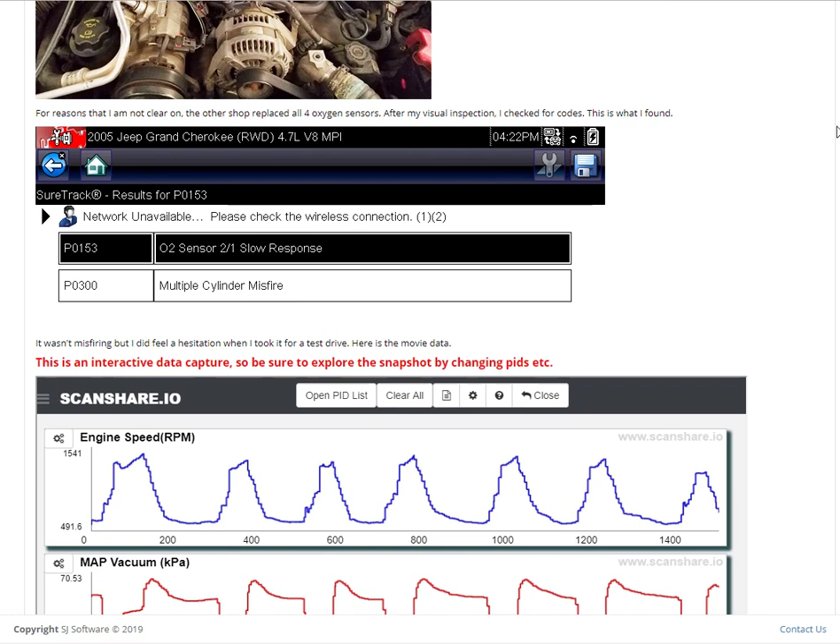So his next step was to check for codes. And when he did, he found 2: a P0153 O2 sensor Bank 2 sensor 1 slow response, and a P0300 multiple cylinder misfire. Now, at the time it wasn't misfiring, but he did feel a hesitation when he took it for a test drive.

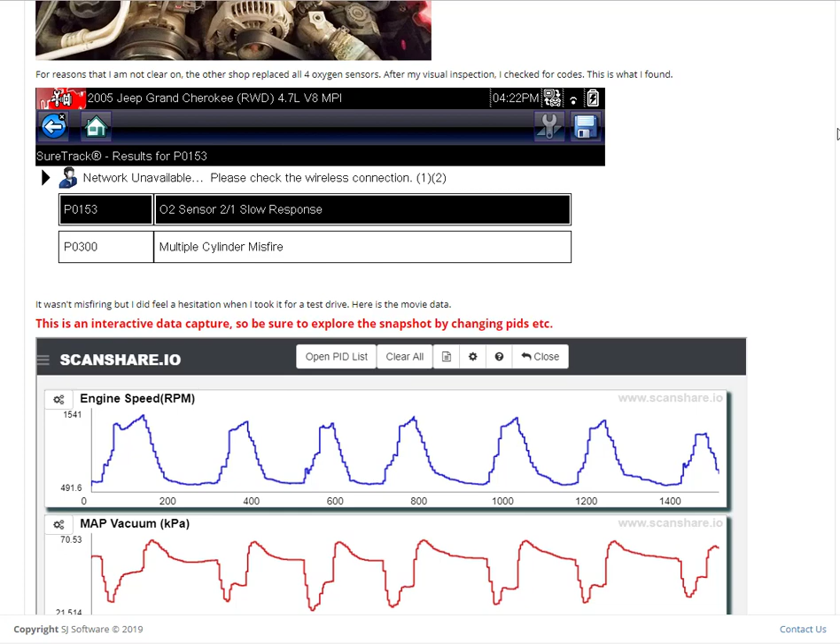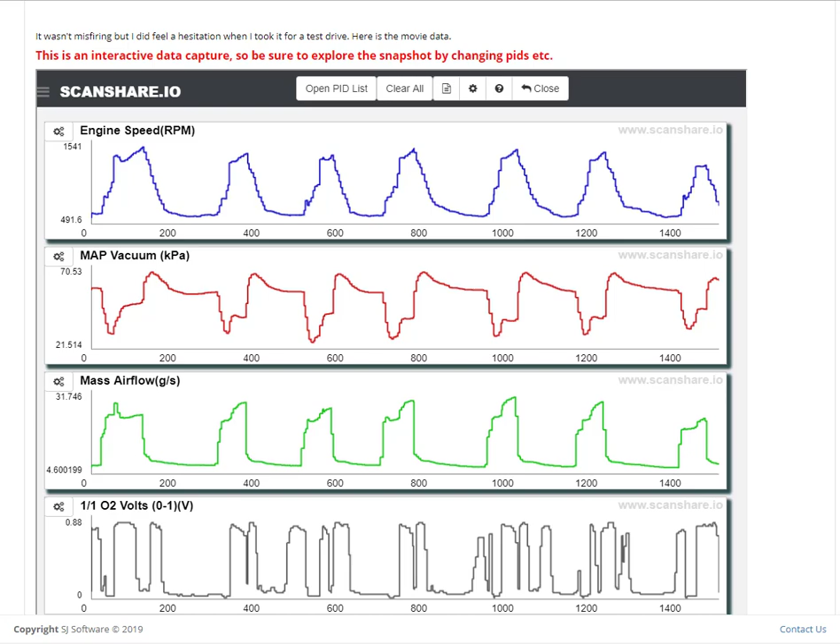He is now showing movie data from his test drive. So let me explain. Working with Carlos, I have impressed on him that when you get a car in for a problem, you want to test drive it. And you want to test drive it for a couple things.

One, the customer has their complaint, whatever it is - runs rough, has misfire, whatever. But you need to know: does it shift? Does the transmission shift? Does it feel like the exhaust is restricted? Whatnot. You need to drive it.

Now, if you're going to drive it, you might as well hook up your scan tool and capture data, because the data will be very important. Now, many technicians just either refuse to do this or don't know how to do this, but I suspect the biggest reason why it's not done is because many technicians don't know how to analyze the data.

So Carlos took this out for a drive to verify the customer's complaint, make sure that it didn't need a transmission or have an engine knock or whatever. And while he was out, he captured the data.

Now, ScanShare by default loads, in this case study format, the first 4 PIDs in the data list. And so we can open up the data list, and these are all the PIDs that he decided to capture.

Now, he didn't look at the data so much because he really didn't know what to look at, but he did what I'd asked him to do, and that is: if you're going to call me for help, or you think you're going to call me for help, I want a data capture, because I want to look at some data instead of fighting with feel and touch and smell and whatnot. So we have this.

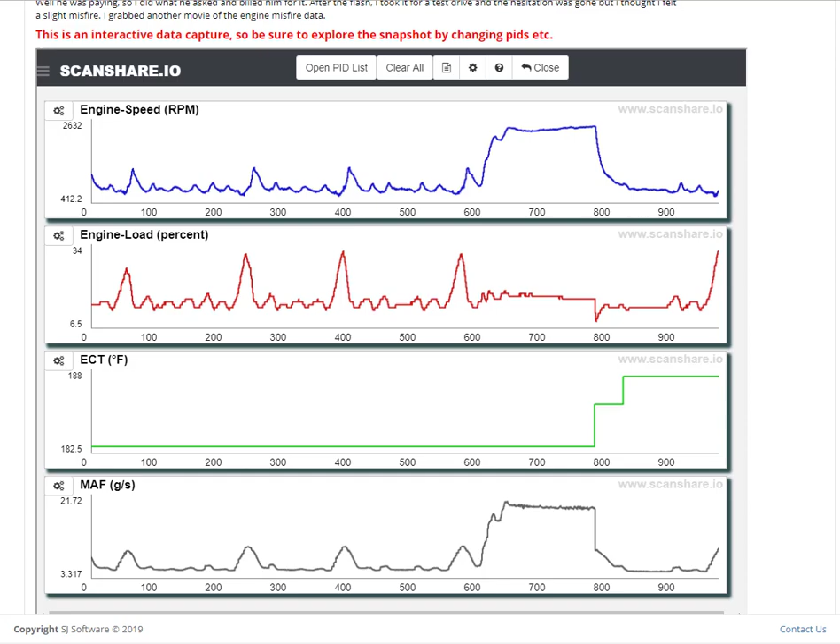Well, so here's the data he captured on the test drive, and we're going to look at it in a minute, but we want to do that at the very end here.

So the hesitation was gone, and the check engine light didn't come on during Carlos's test drive, so everybody thought it was fixed. Unfortunately, a few days later, the customer returned, and the problem is there again, or at least the check engine light is on.

This time Carlos is saying, look, you have to leave this with me, and by the way, yes you do have to pay me to diagnose it, because I'm not going to work for free. You've already done the Google thing, you've already done the YouTube thing, now it's time to be professional about this. The customer said, all right, I'll pay for it and I'll leave it, and he went away.

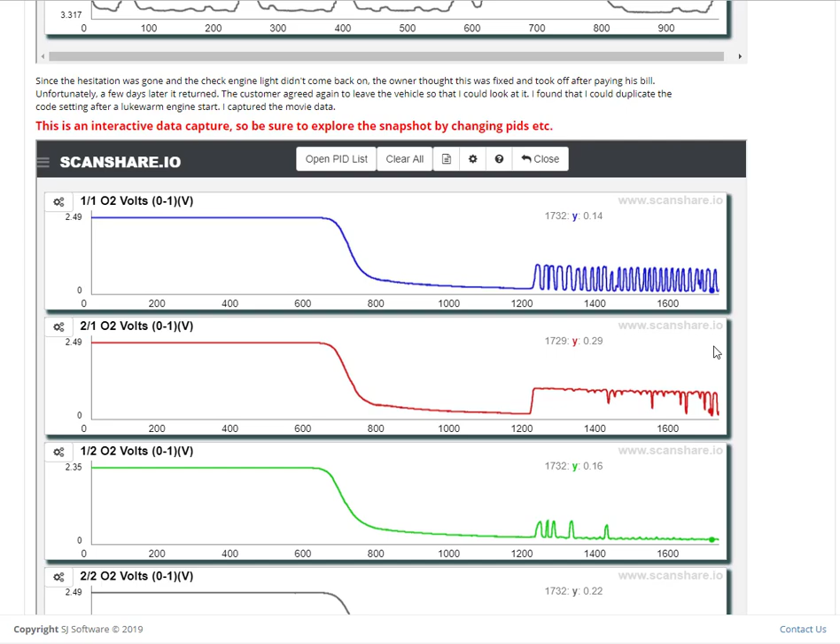So Carlos, for reasons I'll get into in a minute, decided to start this engine up lukewarm in his service bay and see what he could find concerning the O2 sensors as far as their response to a lukewarm start.

So what he has here is the total PID list he captured. Now, there's times on some vehicles where you don't want to pick all the PIDs available because you slow the data rate down. But this car has a pretty quick data rate, so he didn't need to limit his PIDs like this, but he did. So this is what we had to work with.

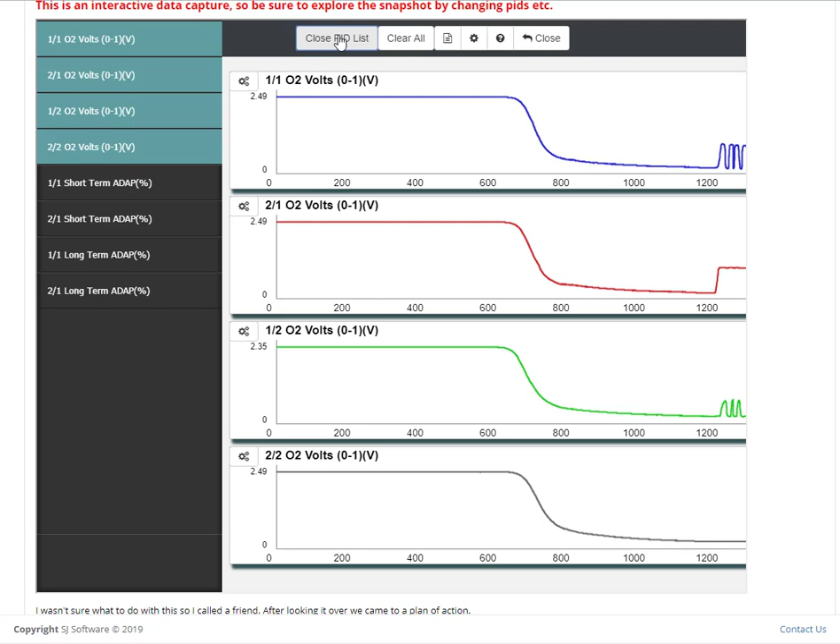So what he did is he's looking at these O2 sensors as they're heating up. Here we have the engine started, and the bias voltage is reading the same on all the sensors. Then right around frame 650, 700, the O2 sensors start heating up and they start responding.

After a period of time, all 4 sensors are reporting lean. Now let's stop, because now let's go to the other part of the story, which is Carlos got to here, and then he called me because he wasn't sure what to do. So I said my first thought was, look, did you get me some data to look at before I come to your shop, before I spend the time to do that? Do you have some data you captured that you can give me?

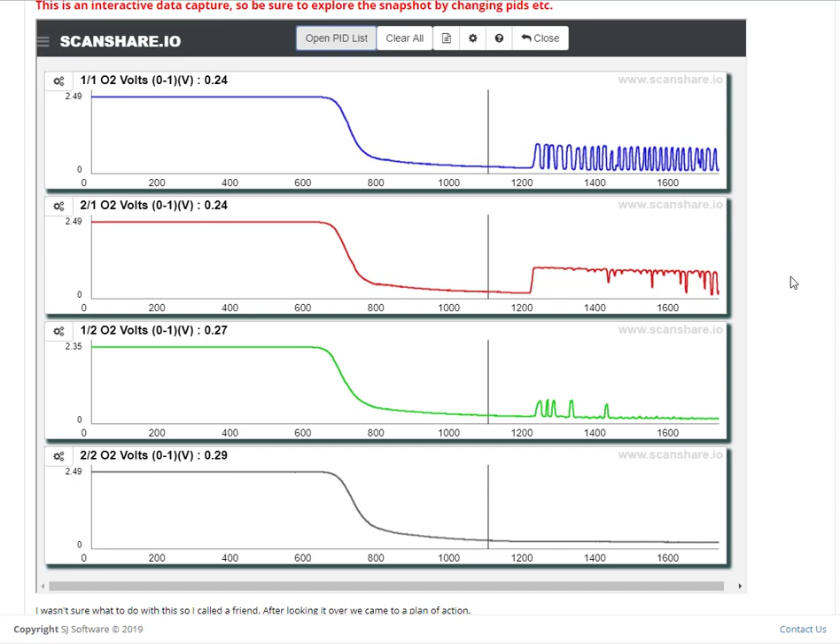If so, give me the ScanShare links, the URL that ScanShare creates for you. He sent it to me, and I looked over the data. So let me show you what I found, starting with his first capture.

Remember, this came to him with hesitation and the check engine light. He recorded the data, but he didn't really look at it. So now I'm going to look at it. First thing I did is open the PID list to see, okay, what PIDs did he give me to work with?

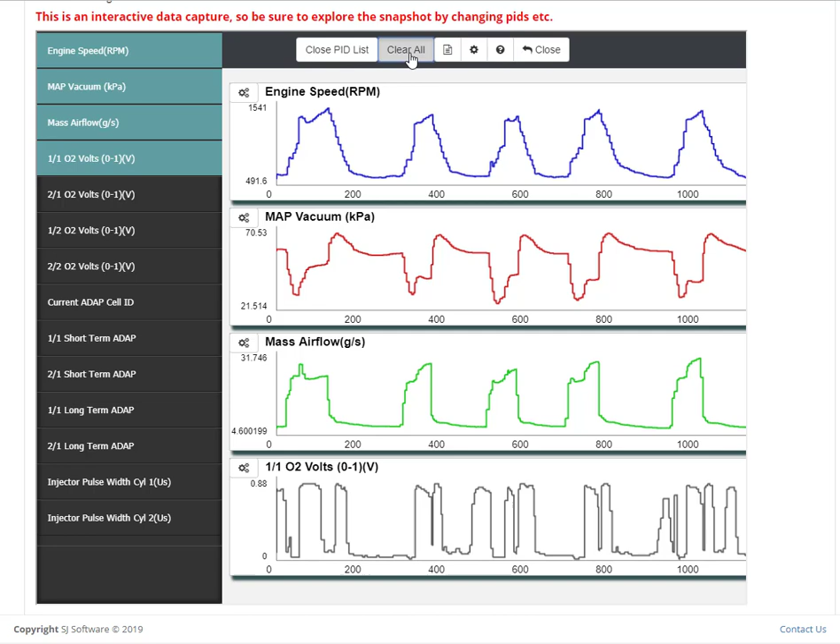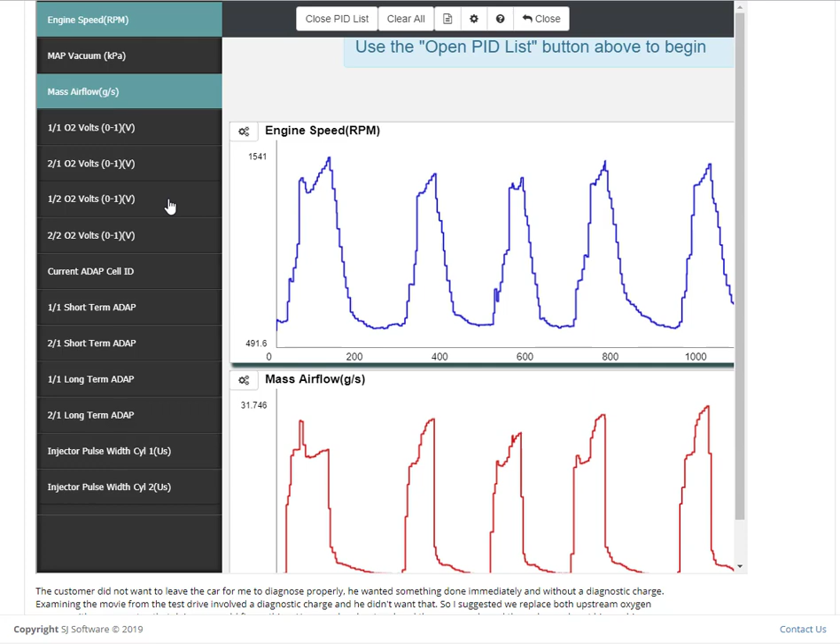There are PIDs I wish he had included that he didn't, but let's see what we can do with this. So we're going to clear these codes, PIDs, and pick different ones. Here's engine speed, engine speed, mass airflow, and then let's look at the upstream sensors for bank 1 and 2. Bring that into focus.

This is a test drive, and there's a number of acceleration events. The first thing I'm going to do is, since this thing hesitates on acceleration, highlight just one of the periods where it's being accelerated. So we have 4 PIDs picked: engine speed, mass airflow, bank 1 sensor 1 upstream, and bank 2 sensor 1 upstream.

Now you can see here we are accelerating. He didn't give me TP, I wish he did, but he didn't. We can see the mass airflow increasing, so we are accelerating. But note what's going on with the 2 upstream sensors: they're lean. And they shouldn't be. We are accelerating, we should not be lean. We should either be switching rich-lean, or in power enrichment mode. Given the acceleration curve here, this is light acceleration, so we should be in closed loop. We should not be seeing the O2 sensors this lean. So this explains his hesitation.

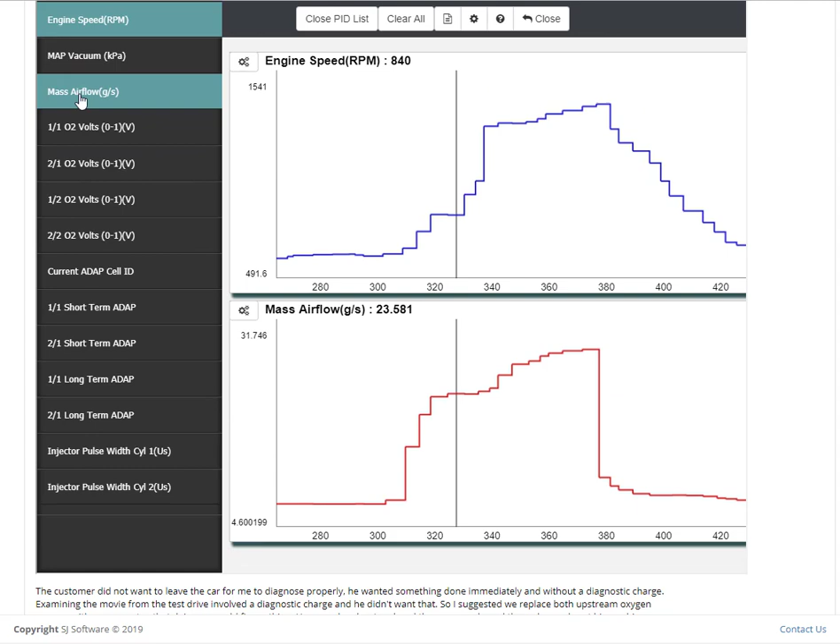So let's dig in further and see if we can find anything else going on here. I've got the engine speed, the mass airflow. I'm going to pick just the bank 1 upstream sensor and use that as a reference, assuming it represents the other upstream sensor because we just saw it did. That gives me more room here to look at stuff.

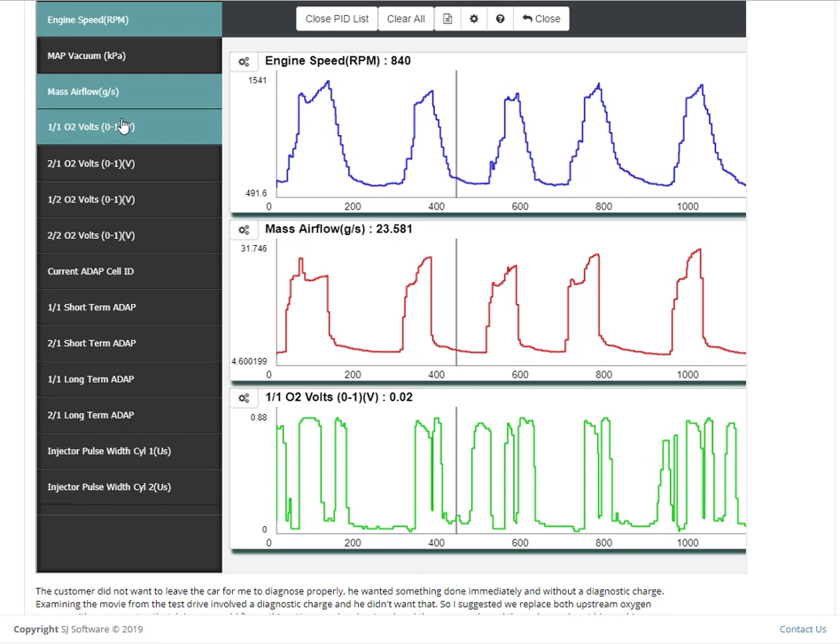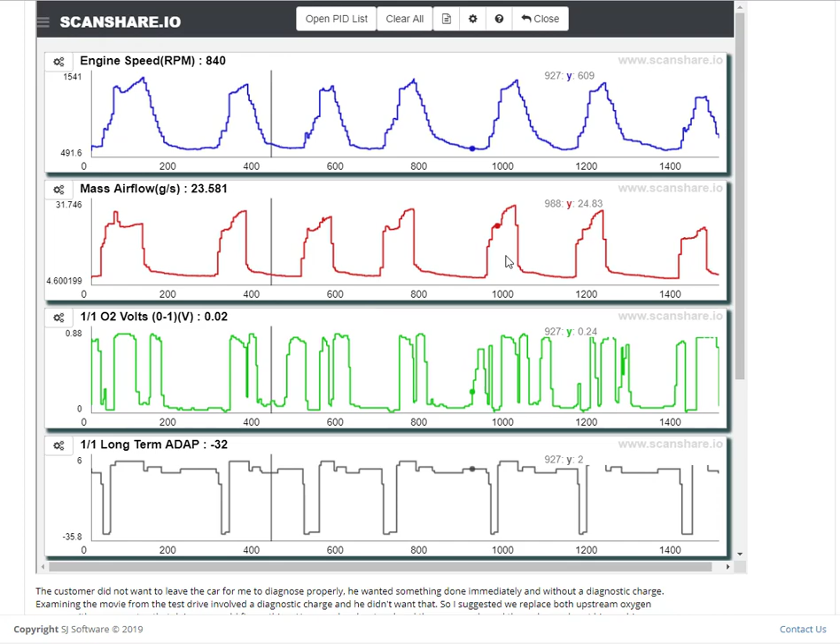And what I did is I looked at the adaptives, the long-term adaptives, and then the current adaptive cell. So we're going to highlight again an area of acceleration. I'm going to put my cursor where you can see RPM going up, you can see the mass airflow going up. The bank 1 upstream O2 sensor is showing lean.

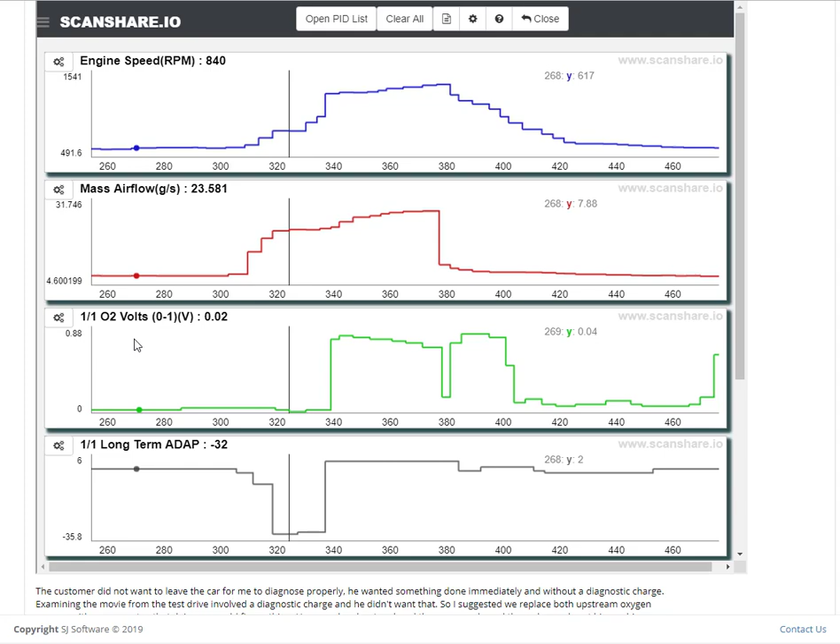Now look at the adaptive. Bank 1 and bank 2 long-term adaptives are very negative. Bank 1 is a lot worse. That means we are subtracting fuel from the base fuel calculation. This is a learned behavior, the ECM has learned to do this. And it shouldn't be doing this because it's lean and it's taking away fuel. So it knows it's lean and it's taking away fuel because in that adaptive cell, we've learned to do that.

Now, an adaptive cell means the long-term fuel trim learned for that RPM load range, and you see the blocks here because it's different cells. So over here, before we had a problem, we're in adaptive cell 5, and we're in adaptive cell 25, and then the long-term adaptation is only 2, which is nothing. Then over here, where we get moving and the oxygen sensor is no longer lean, we're in adaptive cell 13, and our long-term adaptation is 3.

So that's all normal stuff, but what's not normal is this right here, where we are very negative on our long-term adaptive, and we're in cell 16. So this has learned to do this, and that's a problem.

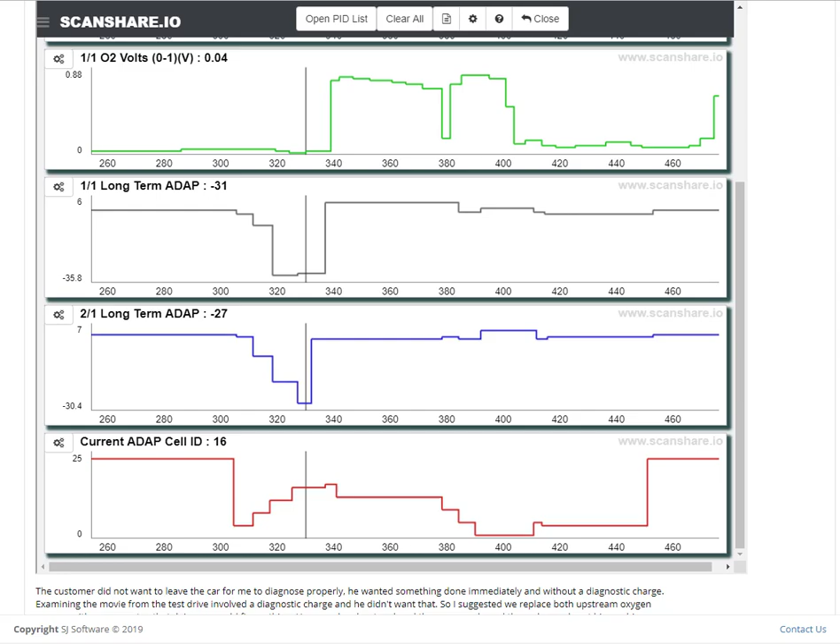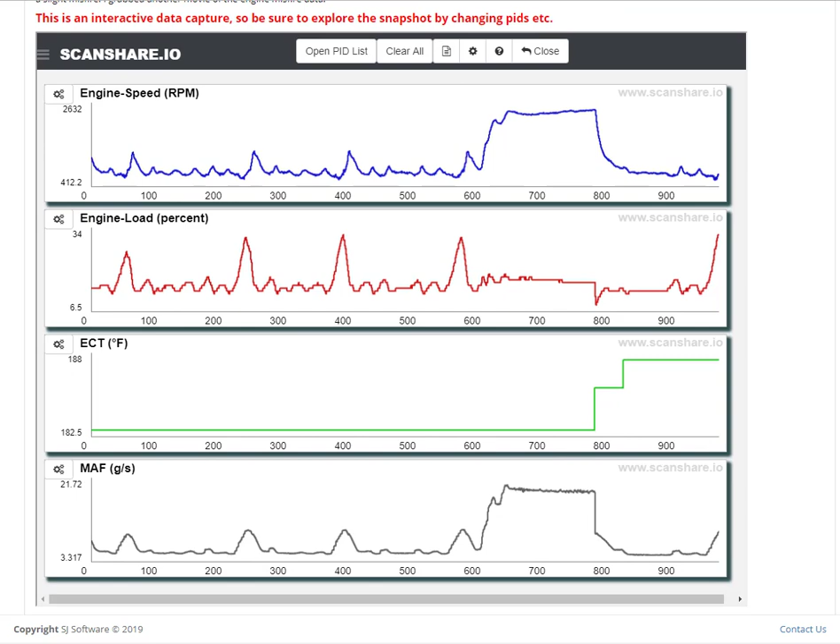So let's now go to his next capture here, and this is where he had the ECM flashed, and then he took it for a test drive, and the hesitation was gone. But he did feel a slight misfire.

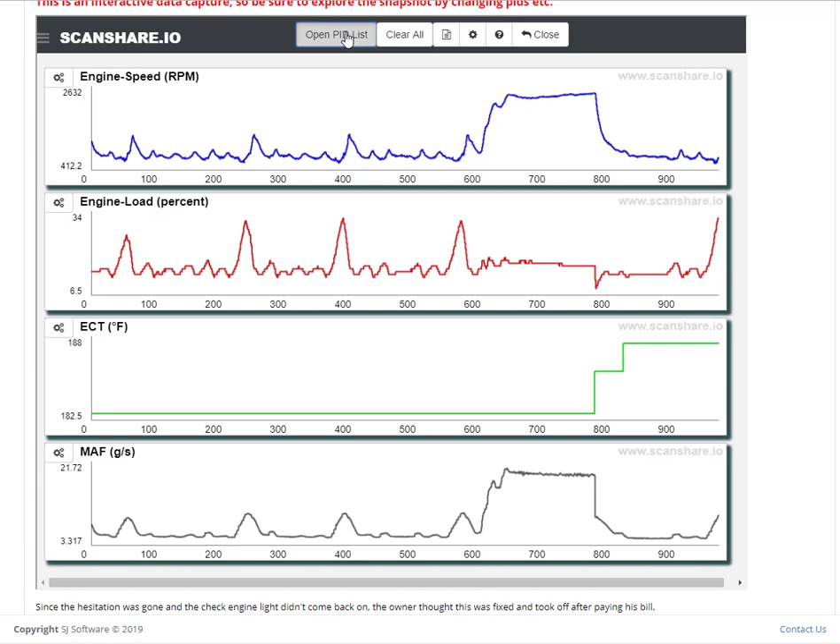So let's open our PID list and see what we have to work with. Here's misfire PIDs. All right, cool. So let's clear that, and we're going to look at current misfire counts as he's looking at this: 5, 6, 7, and 8.

So we see here our misfire counts for cylinder 1 are going up. They hit about 35, then they go to 0, and then they go up. They go to 52, then they go to 0, then they go up to 45, and they go to 0.

If you don't know what that is, the current misfire counts are counted in 200 engine revolution blocks. So after every 200 engine revolutions, the counts add up and then they zero out. If there's enough counts, those counts get sent over to history counters, which we'll look at in a minute.

But the thing here is this number is not going to 200, it's going to 52, which means we have roughly a 25% misfire. It's not a hard misfire. All right, so cylinder 1's got an issue. That's a misfire. It's not something to ignore.

Number 2, nothing much happening there. Number 3, 28, so we're at about 12 or so percent misfire. Nothing to sneeze at, but it's not a big deal. Number 4, nothing happening there. Number 5, nothing happening there. Number 6, number 7, 7 is really not much.

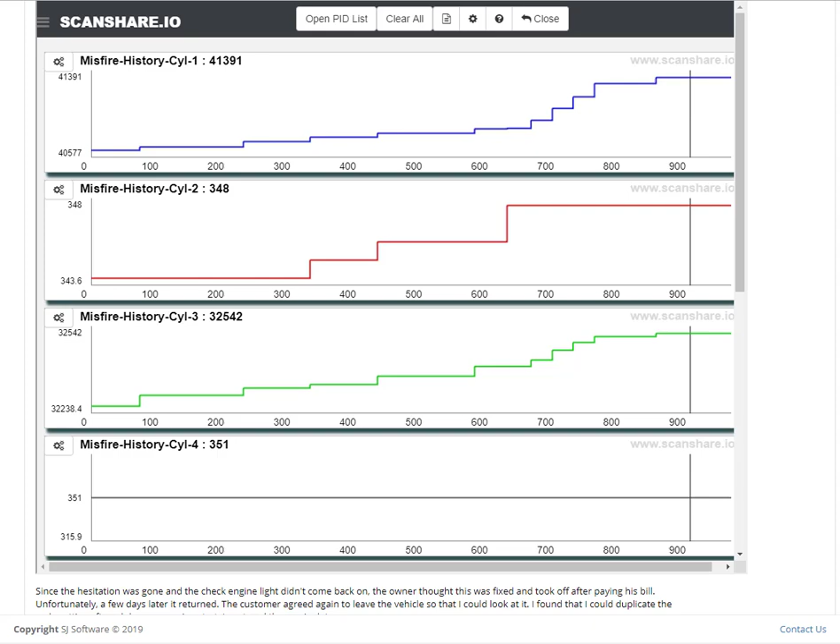On cylinder 1, we have 41,000 misfire counts. That is substantial. Number 2, 348, that's nothing, that's overflow. Number 3, 32,000, that's substantial. Number 4, oops, wrong way to do it. Number 4, 351. That's probably just overflow.

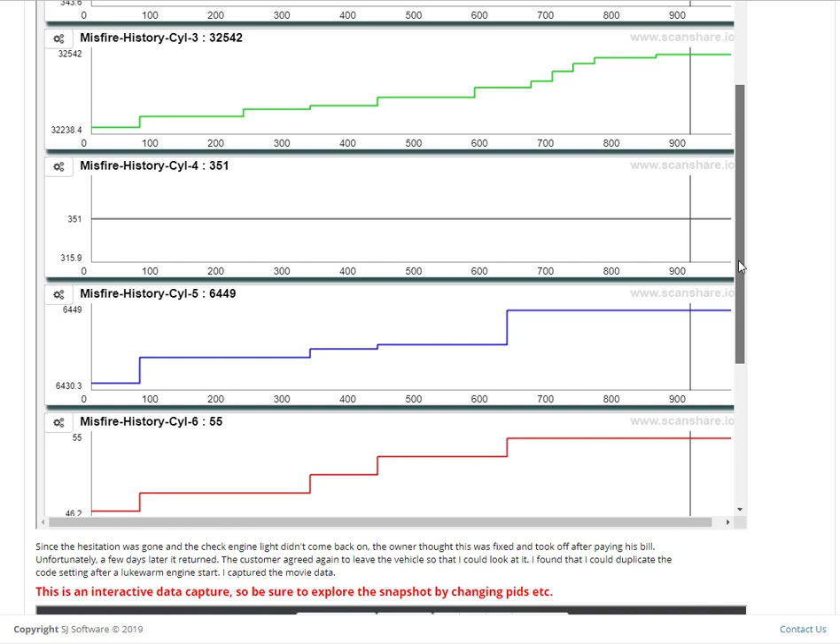Number 5, we have 6,500 misfire counts. Number 6, not much. Number 7, 7,000 misfire counts. And then number 8, 121. So we have some serious misfire counts here, all on bank number 1.

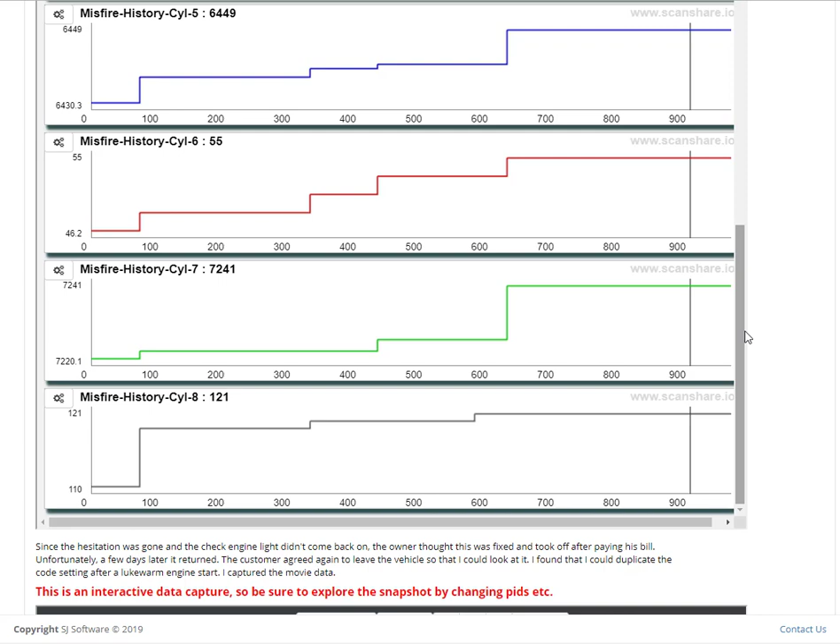Now, remember, the first time he got this, he had a P0300. That's probably where that came from.

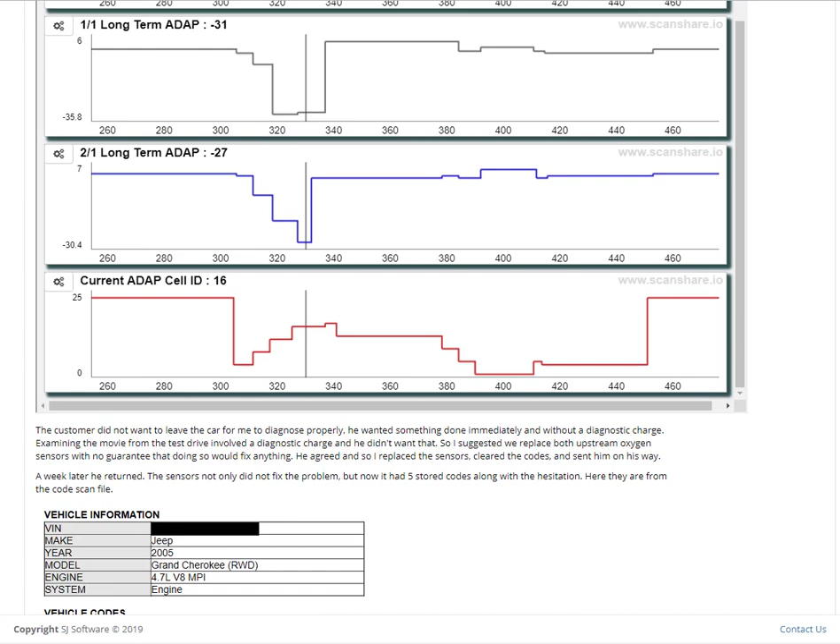So what do we do here? I suggested to him that there's something wrong with these sensors. They are responding too slowly, and going back up to this first capture, there's something really wrong with this capture here where we have the hesitation and we have a minus 30 adaptation.

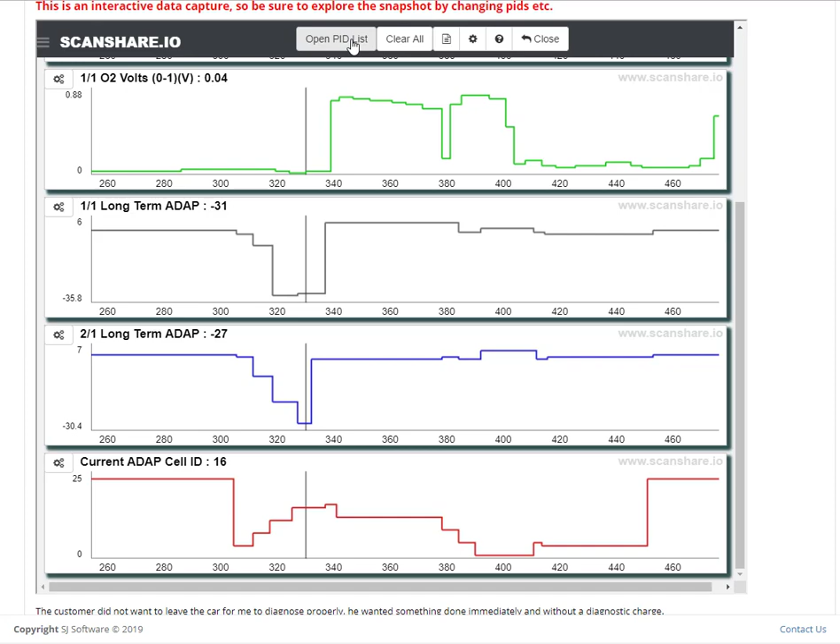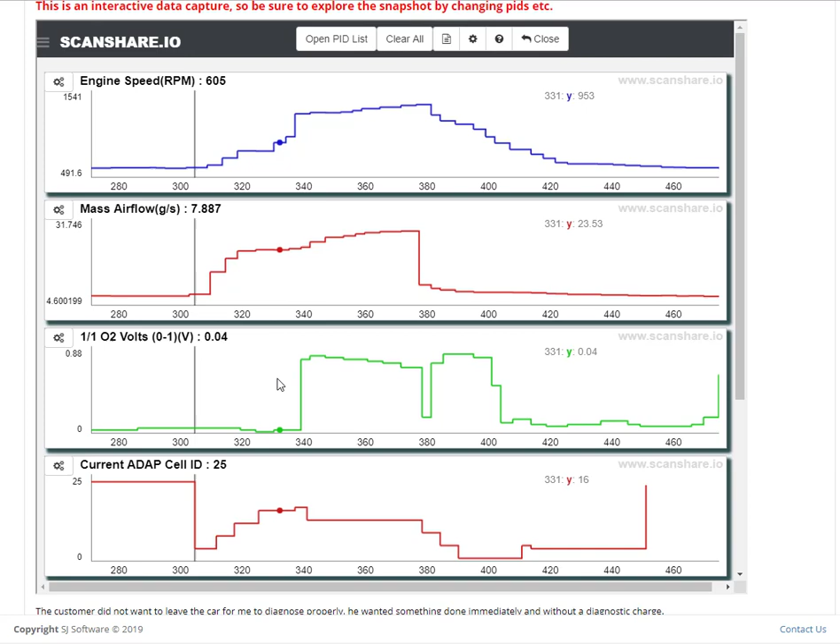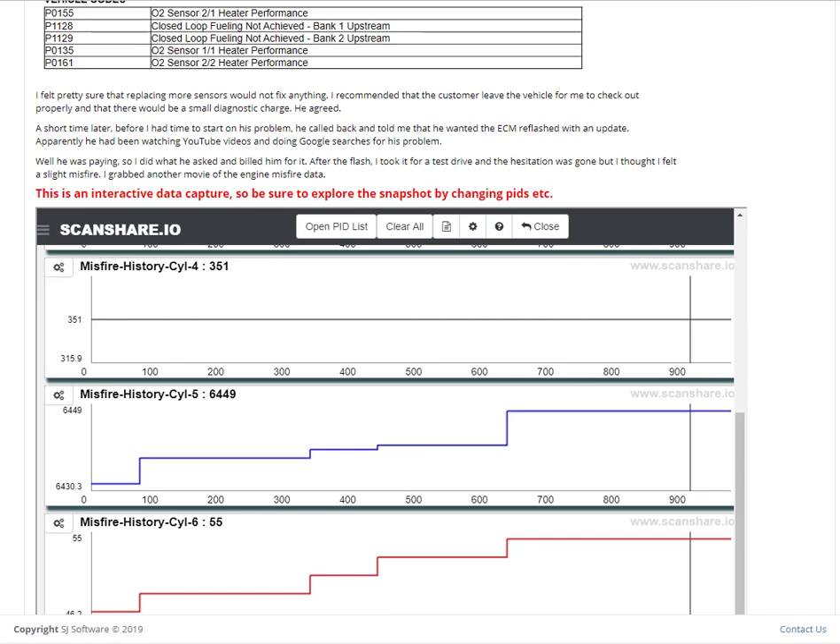And notice that I picked the wrong capture to show you. Let's go to this last one. I believe it's here. It is here. Take these guys off. And I'm going to show you the, oops.

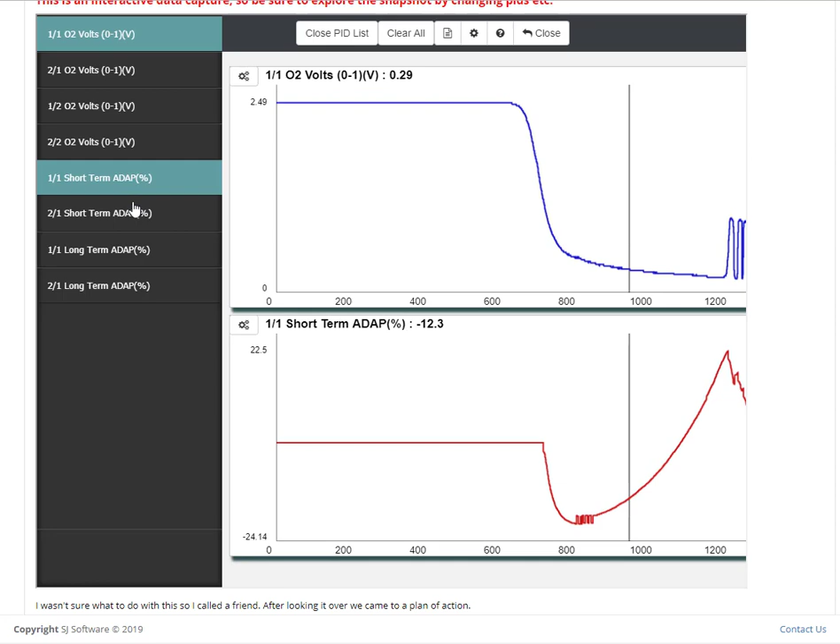So let's look at the short-term adaptives. This is the lukewarm start.

Both our upstream sensors, here's our bias voltage, and then the engine's running, the O2 heaters are running, the sensors start warming up, and right about here, right here, the sensor is starting to come online.

Notice the first thing that happens is the fuel trim adaptive is subtracting big time on short term. And why is it doing that? Well, it's not happy with what it saw going on with the O2 sensors. They came online, and then the sensor voltage was too high, indicating rich, and so it's starting to take away fuel.

And then a little bit later, before we have any toggling, we have the opposite thing going on. We are starting to add fuel like crazy. And remember, we had that learned adaptation up here.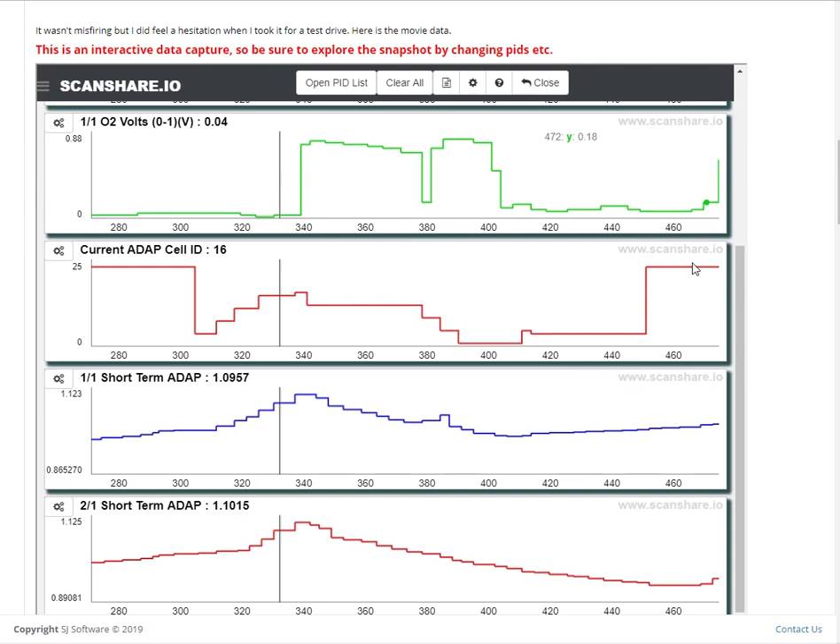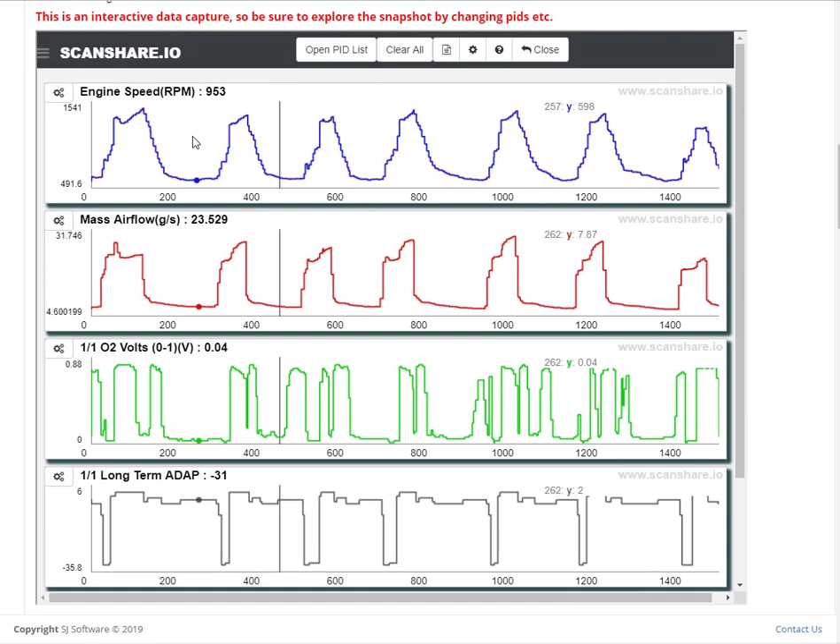Let me bring this up. Okay, we had this learned adaptation that was giving us our hesitation. And so this is all coming together.

We got O2 codes, closed loop codes, we have misfires. This is all looking like we got something going on with these O2 sensors.

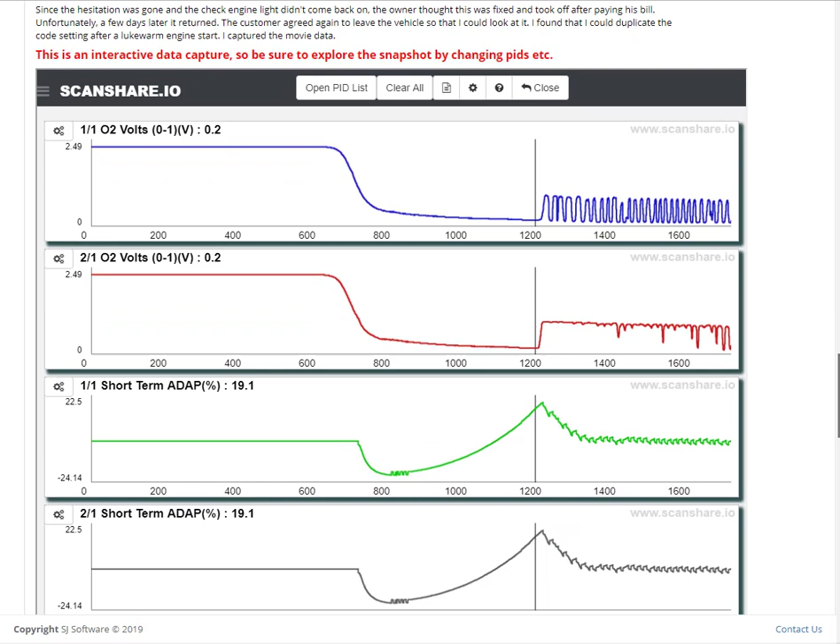So what I suggested we do is we go buy one OE oxygen sensor, just one. Buy an upstream sensor for bank one and get it from the dealer. Not because the dealer is a great place to buy parts, it's because they can look up the vehicle by VIN and get the right O2 sensors.

And sometimes you can't get the right O2 sensor from an aftermarket source because they don't know how to look it up. So he did that, and I went away, and he wrote me back later and told me that he put the sensor in and he found something new. And so this is really interesting.

So let's look at the data here with the new sensor installed in Bank 1 Sensor 1. So we're going to look up these sensors. There's 1.1 and 1.2 and 2.1 and 2.2.

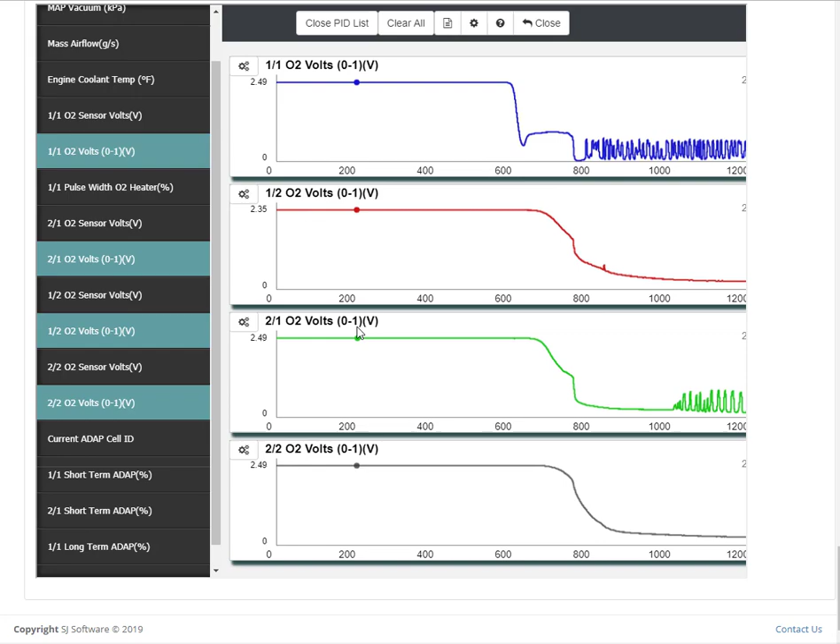All right, so now we're looking at the lukewarm start. He's fired this thing up. Now, Bank 1 Sensor 1, this top one in blue, this guy's been replaced. He's the OE sensor. And so the first thing he looks at is, okay, here's my bias voltage. They're all the same, 2.5.

And then right around frame 600 or so, we can see that the OE sensor is already starting to respond. It's already starting to drop in voltage as the heater warms up the sensor. And very quickly, this sensor is online and working. So 0.86, that sensor is awake.

It's producing a voltage, and it's slightly rich, which is what you'd expect with a cold, as we just enter closed loop. And very quickly, that Bank 1 Sensor 1 sensor starts switching like it ought to. And so we see a big difference between these sensors.

And he's realizing that these other three sensors are not the correct sensors for this car. And so I suggested that he call up the customer and say, look, you want this fixed, you need to buy all four sensors. And so the customer agreed, and he put all four sensors on this car, or this truck.

And after doing so, he took it out, he cleared the codes, took it out and drove it. It drove great. There were no misfires, no roughness. The check engine light didn't come on. The hesitation was gone. This thing was fixed.